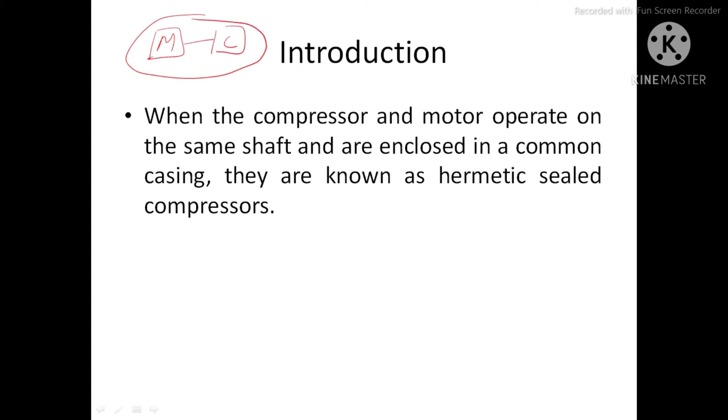When the compressor and motor operate on the same shaft and are enclosed in a common casing, they are known as hermetic sealed compressors. So it means that in the compressor unit of a hermetically sealed type, the motor and compressor are mounted on the same shaft and these are enclosed in a casing. So this is just a rough idea of a hermetically sealed compressor.

These compressors may operate on either reciprocating or rotary principles. So hermetic sealed compressors can be reciprocating type and rotary type and may be mounted with the shaft in either the vertical or horizontal position. The shaft may be in horizontal or vertical position as per the requirement.

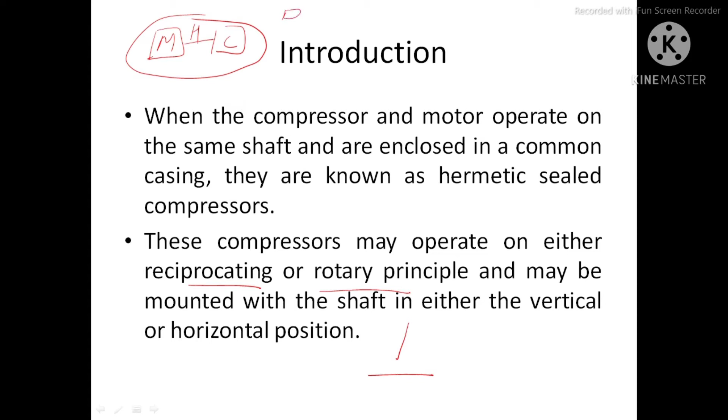So this is the construction of a hermetically sealed compressor. Let's understand the construction and working of this compressor. First of all, let's see this motor. We have a motor here and this motor is connected to the shaft, and this is the crankshaft actually, and the crankshaft is connected to the piston. This is your connecting rod and this is your piston and this is your cylinder arrangement, and SV means suction valve, DV means discharge valve, and here is the oil sump at the bottom of the compressor.

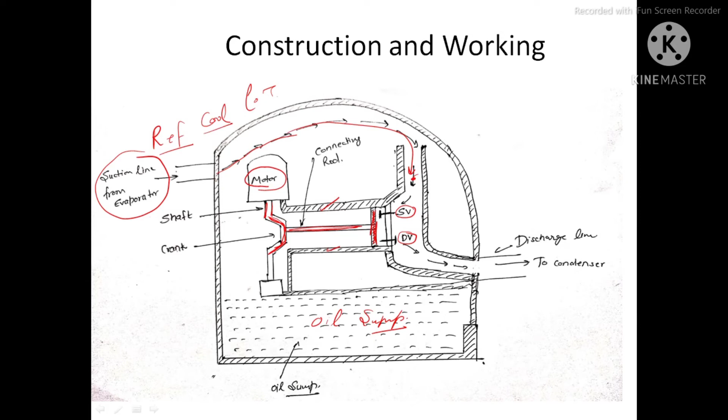So now what happens, you can see the suction line from the evaporator. The refrigerant from the evaporator, which is cool and has low temperature, will be entering near the motor and going to the suction valve. You can see from here. So why are we passing this refrigerant very near to the motor? Because after operation for a long time the motor temperature also increases, so this motor gets heated up. So to cool down this motor or to absorb the heat of this motor, we pass the refrigerant from the evaporator very near to the motor windings, and then this refrigerant enters into the suction valve and the compression happens

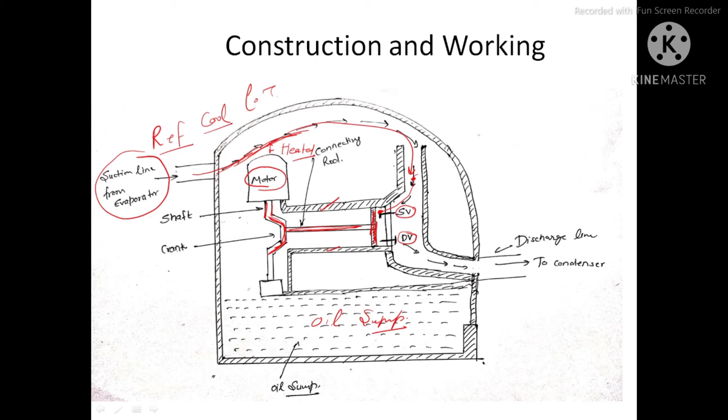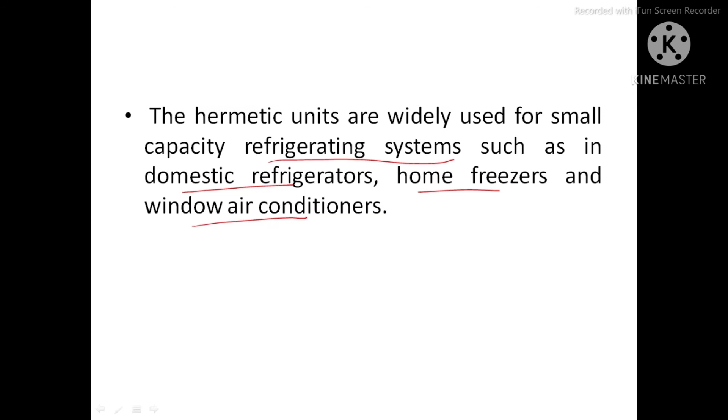with the help of a reciprocating piston, and after compression, when the refrigerant temperature is high, it goes to the discharge valve and then to the discharge line and then to the condenser. The oil is used to lubricate the system, as we are representing here with the reciprocating piston. The hermetic units are widely used for small capacity refrigerating systems like domestic refrigerators, home freezers, and window air conditioners. You can easily see these hermetically sealed compressors in your home refrigerators.

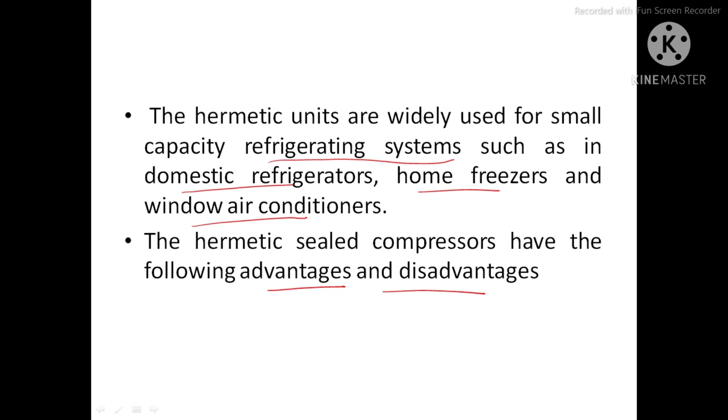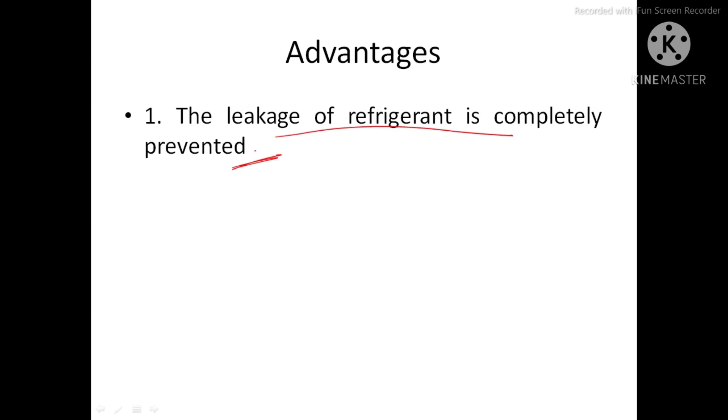Hermetic sealed compressors have the following advantages and disadvantages. So let's go through some advantages of these hermetically sealed compressors. A big advantage of this compressor is that the leakage of the refrigerant is completely prevented. So you know from the construction that the whole system is sealed in one casing and the motor and compressor are mounted on the same shaft, so there is no leakage in this system. It is less noisy, and the third advantage is it requires small space because of compactness. As you have seen from the construction, the lubrication is simple as the motor and compressor operate in a sealed space with the lubricating oil.

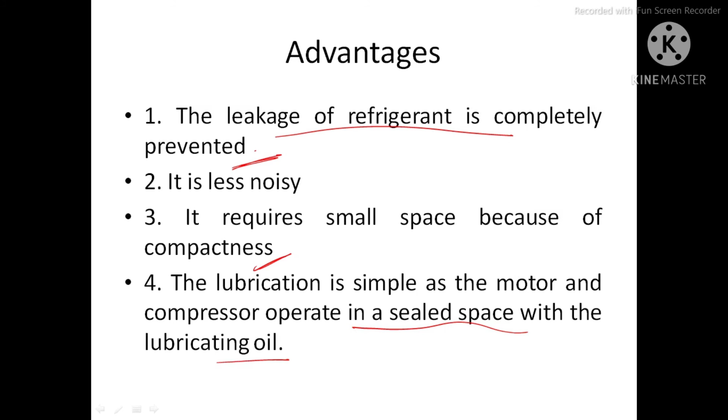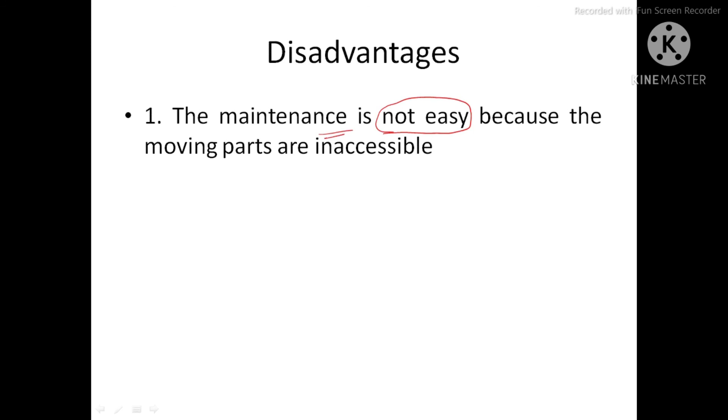So let's discuss some disadvantages also. The maintenance is not easy because it is sealed inside a casing, so maintenance is not going to be easy because the moving parts are inaccessible. A separate pump is required for evacuation and charging of the refrigerant. We need to have a separate pump for evacuation and charging of the refrigerant.

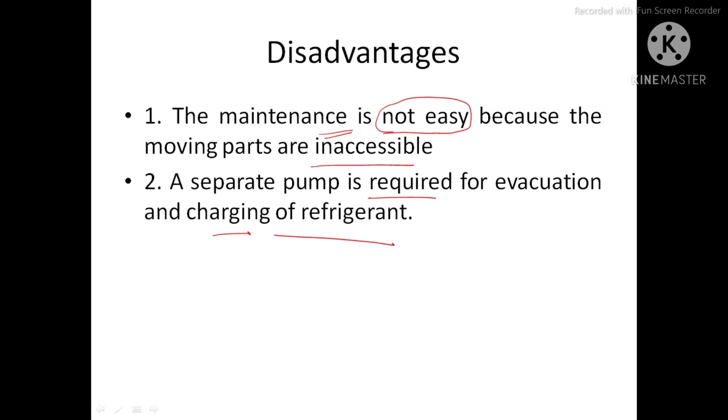So this completes hermetically sealed reciprocating compressors.